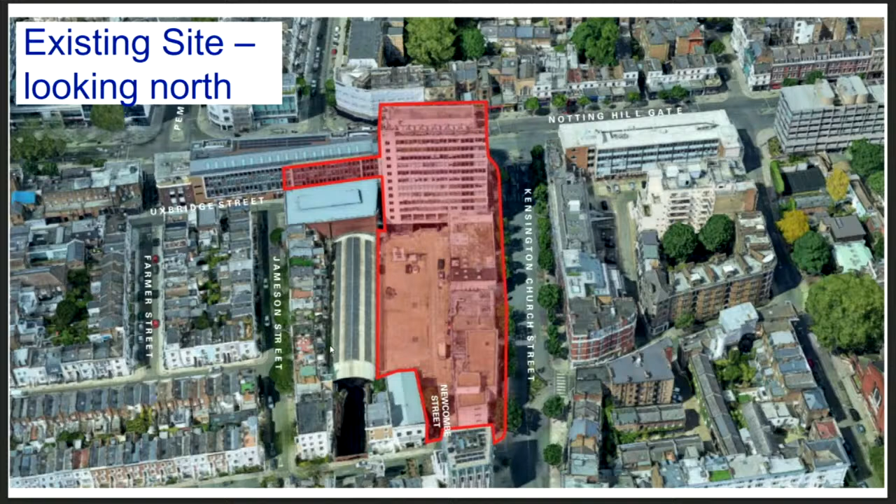So the proposals before you this evening relate to an urban block and an urban space that dates from the late 1950s at the junction of Notting Hill Gate and Kensington Church Street. The site comprises Newcombe House Tower, the podium, and the paved public realm in front of it. It also includes low-rise buildings on Kensington Church Street, terminated by Royston Court, a surface car park, and accesses from Newcombe Street and Uxbridge Street. The listed roof of the Notting Hill Gate Underground Station is at the western boundary of the site, with residential occupiers in Jameson Street and beyond.

The front of the site is marked by a 12-storey tower with a London plane tree at the corner of the junction. There is a bridge structure at 1st to 3rd floor levels of the tower, which connects to neighbouring David Game House, and creates an undercroft at the eastern end of Uxbridge Street. The existing frontages of Notting Hill Gate and Kensington Church Street form part of the primary shopping frontage of the Notting Hill Gate District Shopping Centre.

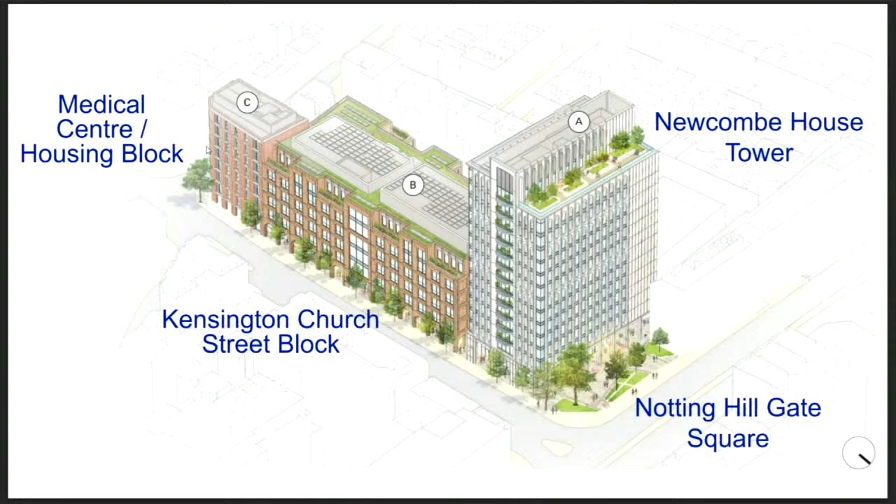The last building, the Medical Centre housing block, would be a new 8-storey building plus basement and setback rooftop plant, with medical floor space occupying the lowest levels and 8 social rent homes above.

The current car park would be substantially filled with new built form, leaving a 20-metre separation distance to the rear garden boundary of Jameson Street.

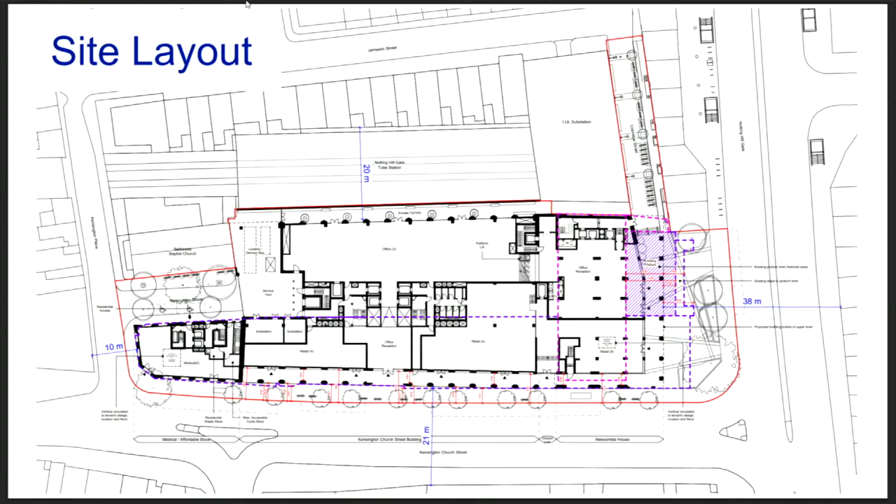In this extract of that previous diagram, it focuses on the site layout of the Newcombe House Tower and Notting Hill Gate Square. The existing Newcombe House Tower would be largely retained, and the existing upper floors are shown in a pink dotted outline. There would be an approximate 1.8 metre extension eastwards towards Kensington Church Street.

The existing ground floor footprint, including the steps to the podium, is shown in a purple dotted outline, and the existing retail corner unit would be demolished to increase the public realm.

You can see the existing podium area here in a purple hatched area, and the steps beyond would also be demolished to facilitate an 8-metre extension of the tower at its upper levels towards Notting Hill Gate.

The ground floor would feature a double-height colonnade, identified in the diagram with the columns that come down to ground, wrapping along the building, along Notting Hill Gate, going round to Kensington Church Street. This colonnade, fronting Notting Hill Gate, would line up with the route onto Uxbridge Street.

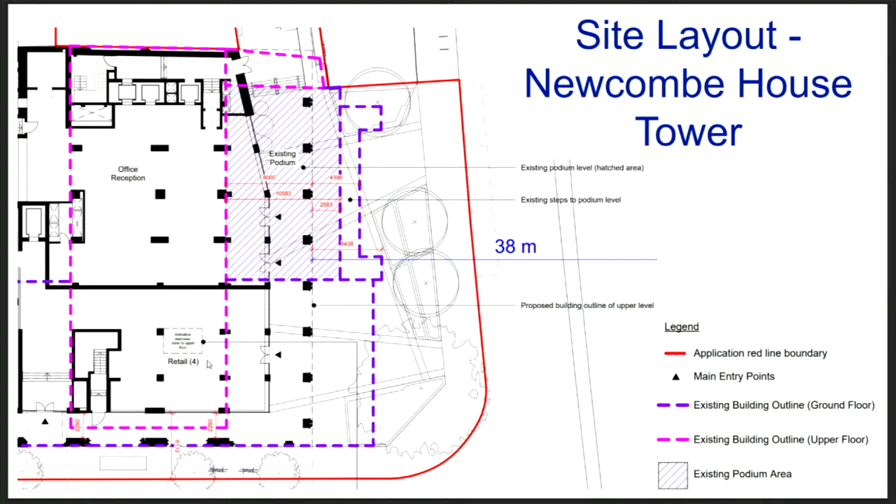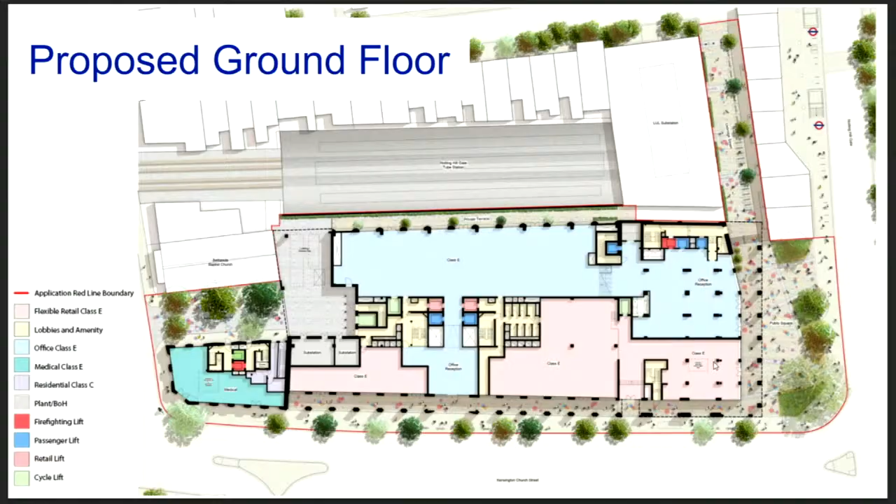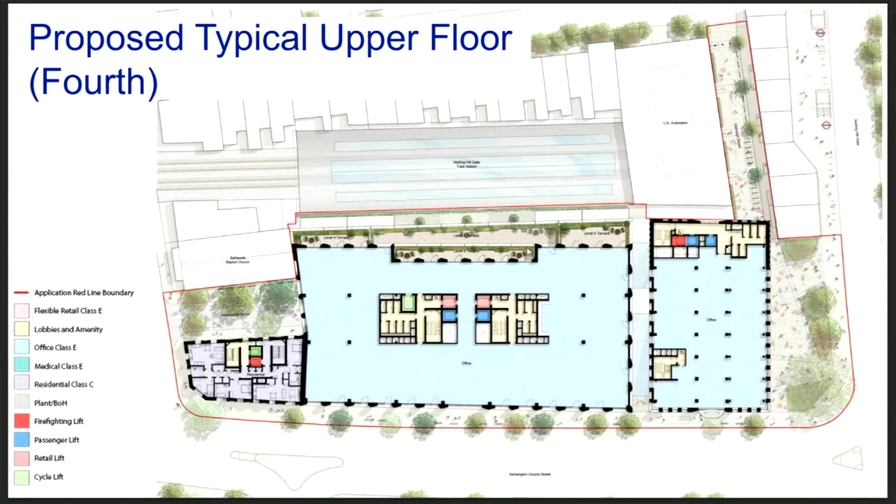This slide shows a typical upper floor plan, the 4th floor. The housing, shaded in purple, starts from the 4th floor, and the office floor space in blue would have access to outdoor amenity through the curved balconies to the tower, fronting onto Kensington Church Street, and also staggered rear terraces on the Kensington Church Street block, starting at 3rd floor to the rear and going up to the 5th floor. There would also be terraces to the front at 5th floor level 2.

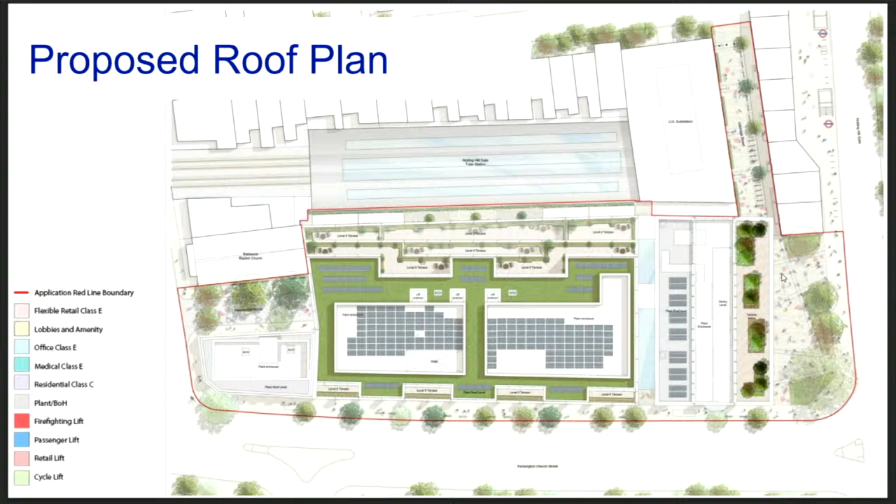Each of these 3 buildings has been designed with its own distinct character to respond to its immediate context. In this instance, the tower takes reference from the family of 1950s buildings on Notting Hill Gate, such as the vertical grid and solid vertical elements. However, the elliptical window openings would be uncharacteristic to Notting Hill Gate, though resident engagement described them as more visually interesting than the rectilinear openings on surrounding buildings. The extent of glazing and projecting curved balconies would be contrary to the unadorned elevations of 1950s buildings on Notting Hill Gate and the character of Kensington Church Street, but nevertheless the overall design is considered acceptable.

Notting Hill Gate Square has been designed to be used flexibly. It would contain some planting and seating that would not impede pedestrian desire lines to the office entrance and the route towards Uxbridge Street, and the tree planting would help create a buffer to the busy road.

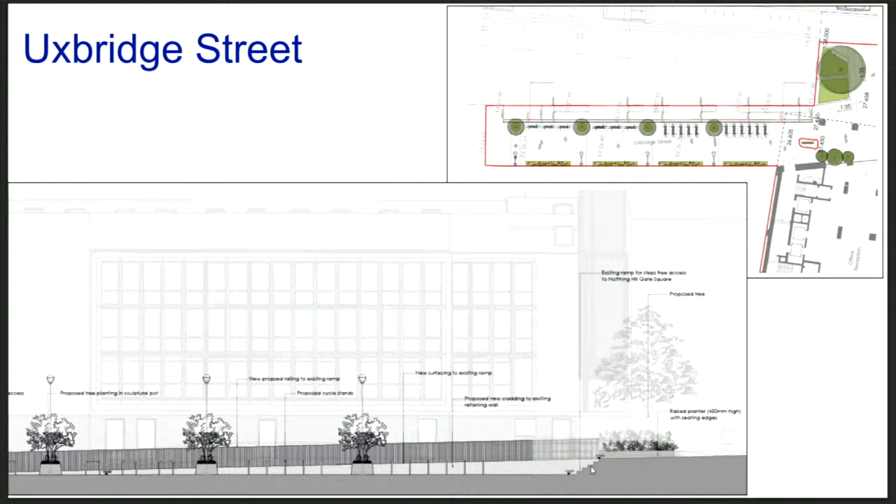The Kensington Church Street block has a staggered roofline, and the facade has been divided into bays, which helps break down its bulk, though the repetitive appearance over the long plot length would add to its perception of height. The central bay at the front would have a slightly different design, successfully marking the building entrance. There is some taller glazing at the 4th and 5th floor levels of the front elevation, causing a slight sense of top heaviness, and the roof plant would also diminish the quality of the roofscape, but overall in design terms this is considered an acceptable design.

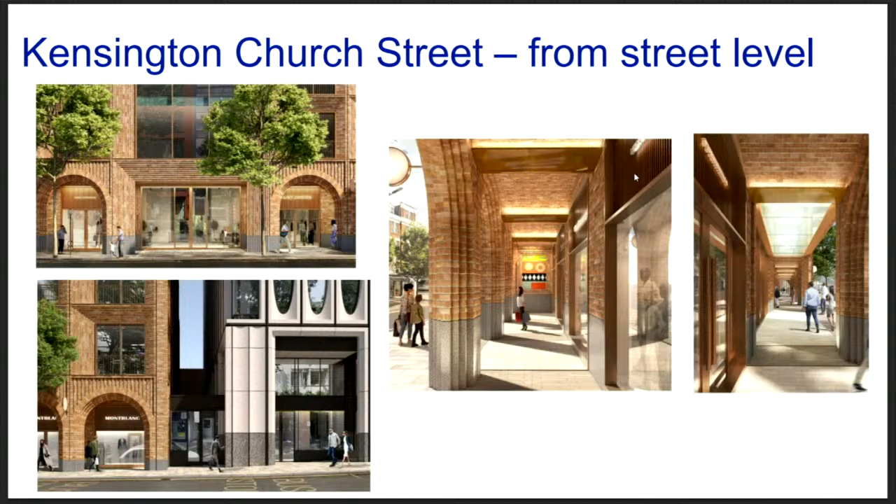Here are a selection of images showing the office entrance and the experience of the colonnade, and also a slightly unusual gap between the Kensington Church Street block and the Newcombe House Tower.

The height of the medical centre and housing block would bookend the urban block at its southern end. The proposed height at 8 stories would be higher than the varied range of 2 to 6 storey heights along the street, but nevertheless it would sit comfortably in both short range and long range views, and the corner chamfer to the building would help provide a transition between Kensington Church Street and Kensington Place.

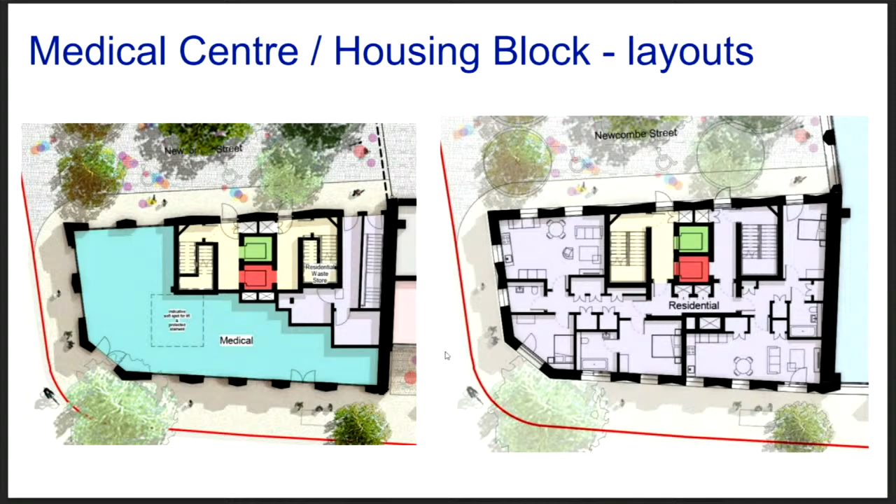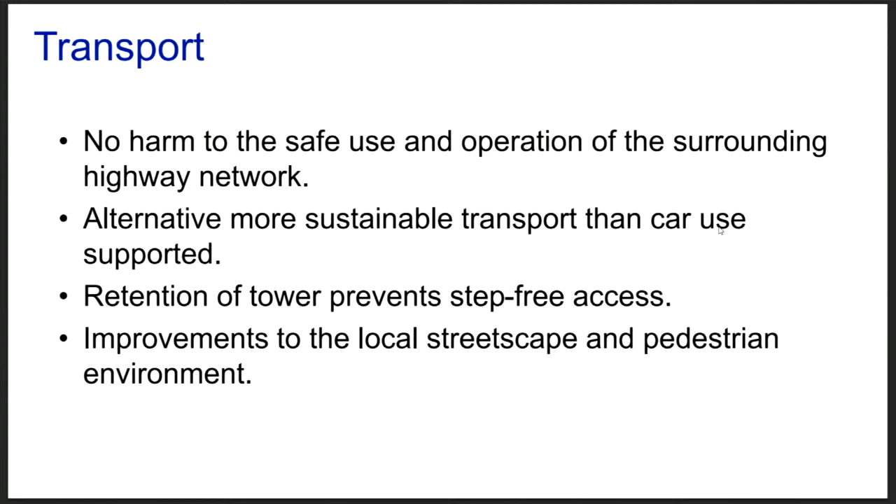Moving briefly on to transport, the proposals are considered acceptable in terms of impact on the use and operation of the highway network. It promotes more sustainable transport than the car. The matter of step-free access to the Notting Hill Gate underground station has been explored, and it has been accepted that the retention of the tower and its foundations prevent that access from being formed. There would also be benefits to the streetscape and the pedestrian environment.

The scheme performs well against environmental requirements. There's a slight shortfall in the urban greening factor score, but the proposals demonstrate that all greening opportunities have been taken on site, and the proposals do meet environmental standards in regard to this list of environmental topics.

Coming then to the public benefits, the benefits identified from these proposals are the enhanced and additional office floor space and enhanced retail floor space to the highly accessible Notting Hill Gate town centre, with the associated employment opportunities that brings; a new medical centre as a social and community use; 8 high-quality, affordable, social rent homes that meet identified needs in this borough; enhanced publicly accessible space, which is attractive, safe, inclusive and well connected on Newcombe Street, Kensington Church Street, Notting Hill Gate and Uxbridge Street; enhanced connectivity from Notting Hill Gate to Uxbridge Street; and also the enhanced appearance of the site. These are all matters which are given substantial weight in the planning balance.

The planning balance is very important. Here it is comparing the benefits of a proposed development with the harm it may cause, and very rarely are developments entirely without harm or entirely without benefit. The report demonstrates that all benefits and harms have been identified and weighed up to arrive at the recommendation.

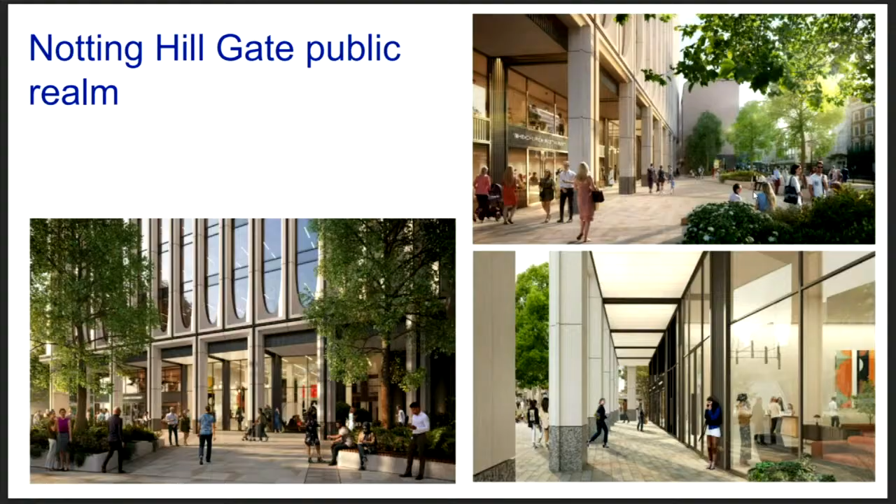I've been involved with the site for 30 years, because I was one of the co-founders of the Notting Hill Gate Improvement Group, which planted most of the original trees, including the tree now called the Newcombe tree. It's a very, very difficult site to work with. It's quite a hostile site.

Because of that, because there's a lot going on in the substructure, a lot of the planting being proposed isn't going to be planting in soil, it's planting in containers. Planting in containers is problematic because most plants, and certainly most trees, don't root as well. They're much more susceptible to disease if they're containered, and need much more careful maintenance and watering. We would love to see a full landscape proposal that included watering, sustainable rainwater collection from the building, and a watering, planting, and maintenance proposal.

We'd certainly like to see a condition requiring anything which fails to thrive or dies must be replaced. We think it's important that, as the urban greening factor hasn't been met, despite its massive size, what is provisioned is actually sustainable and workable. We've seen an excellent example at 133 to 139 Westbourne Grove, where a condition was placed on a consent that a full landscape application came before planning committee. We found it concentrated the developer's mind wonderfully on net biodiversity gain, sustainability, water collection, all these good things.

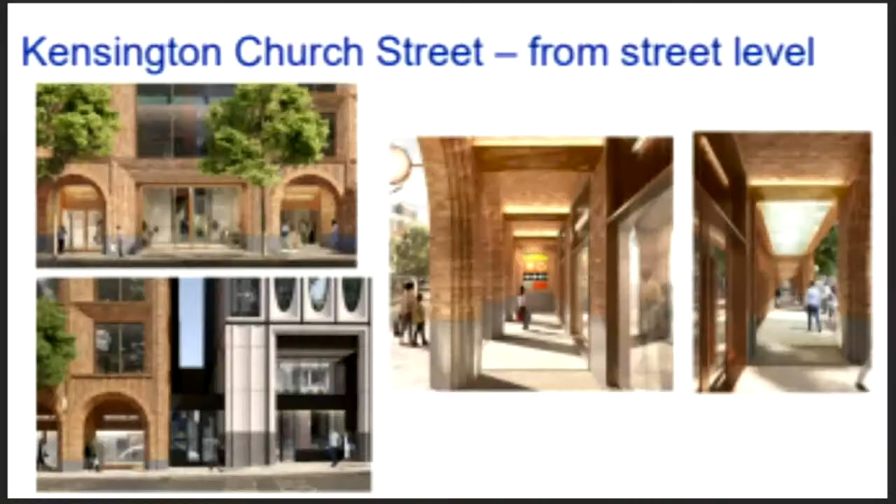I'll also make the point that the application was reviewed by the Met Police. They have a designing out crime team, and when they provided their comments, there was no reference to physical barriers being necessary in this location. They were aware of the existing antisocial behaviour issues, and instead recommended the use of CCTV and a good lighting strategy as a crime deterrent, which will be incorporated into the proposals.

I'd also like to make the comment that gates and barriers are a very outdated means of trying to solve antisocial behaviour, and I'm quite happy to take you through all tiers of policy and guidance, from national level cascading down to local level, which is very clear that gates and barriers are not the way to solve antisocial behaviour. If that's helpful, I'm happy to give you the references.

I wasn't actually suggesting gates or barriers. I was suggesting a review after a year to see what impact opening up that street has had. I can certainly see why lighting and CCTV are sensible security measures to implement there. My question was, is there some ability to put in a review, say after a period of time, I picked a year randomly, to see what impact the measures have had?

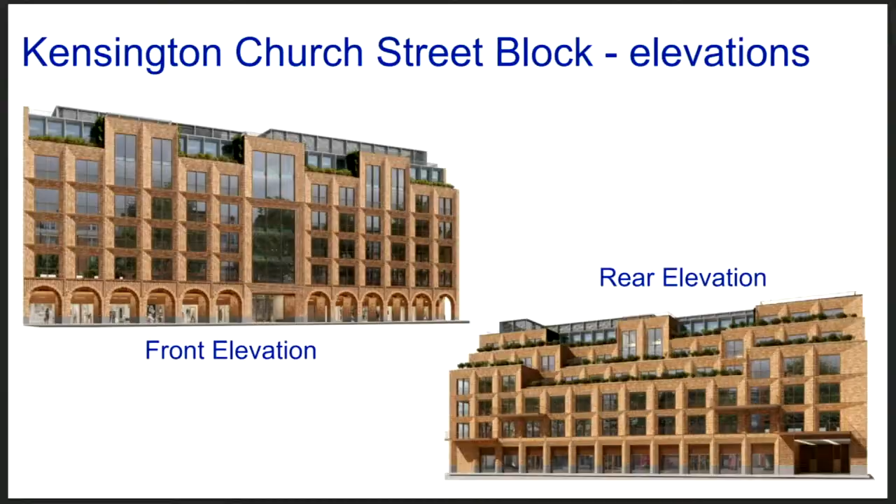We've heard a lot of debate this evening. I think in terms of land use, it may well be that planning policy and the development plan is a distinctly slow-moving river in relation to the actual need for office accommodation, even the very best quality, most accessible office accommodation. But there's no doubt about it, it's supported in policy, so it would have to be considered a benefit of the scheme.

I think the new medical centre, the NHS official bodies seem to be content with that, and we've got new housing that meets acceptable standards. In terms of design, I think overall I actually agree with colleagues, it's a slightly mixed picture. I think aspects of the design are rather good - for example, the new building on Church Street, facing Church Street, is rather a fine building, certainly much better than what's there at the moment. And I think other aspects are reasonable.